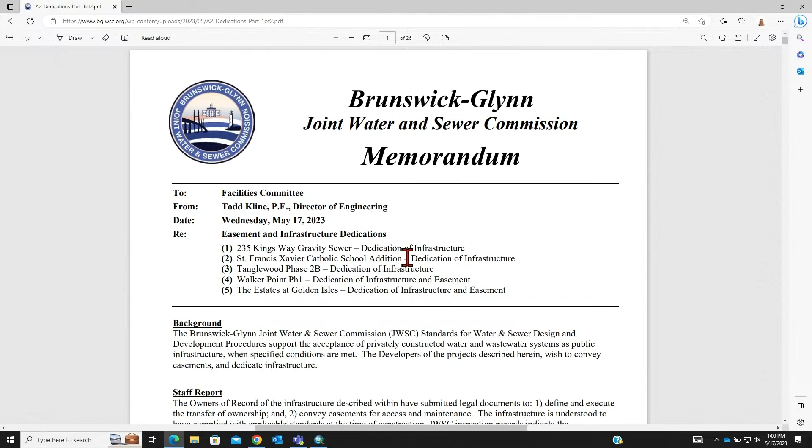All right, Commissioners, this is easement and infrastructure dedications. There are 5 items on this agenda, and I will give you a brief description of each item, as well as a location, and if there's any questions, I'm happy to answer.

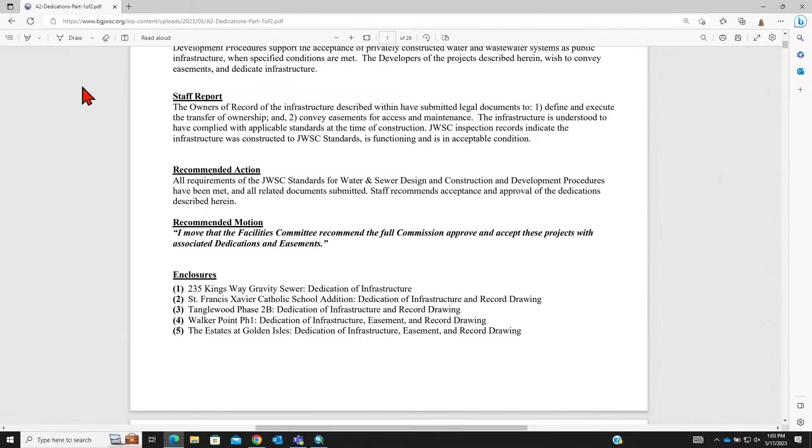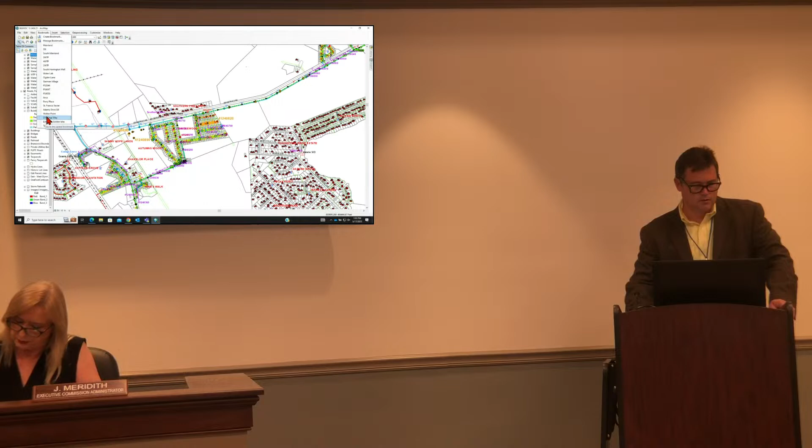Item number 1 is 235 Kings Way Gravity Sewer, dedication of infrastructure. The homeowner needed to extend sewer service to their property, so they facilitated that improvement at their expense. It's on St. Simons Island, right off of Kingsway and Bartow Street. As shown in orange here, as proposed, if accepted as public infrastructure, we will then turn it green, indicating it's publicly owned. Right now, it's just this home here that's tying in, 235 Kingsway.

What's that line, sir? It's a 6-inch sewer lateral. How many manholes? These are clean-outs, the fittings are represented by clean-outs, but it ties directly into a manhole on Magnolia.

The houses on the other side of the street? Yes, sir, what this will do is open up sewer connections for the home across Bartow Street. They're currently on water only, so it will at least give it one or two other connections to make available with gravity sewer.

Next item is St. Francis. Can I ask one question? Yes, sir. So the homeowner paid for the installation of it. That is correct. Was it inspected, contracted with a local contractor? Commissioner, you're correct, the homeowner, at their expense, installed this improvement. It was actually designed, they hired a local engineer to design and present it to Joint Water.

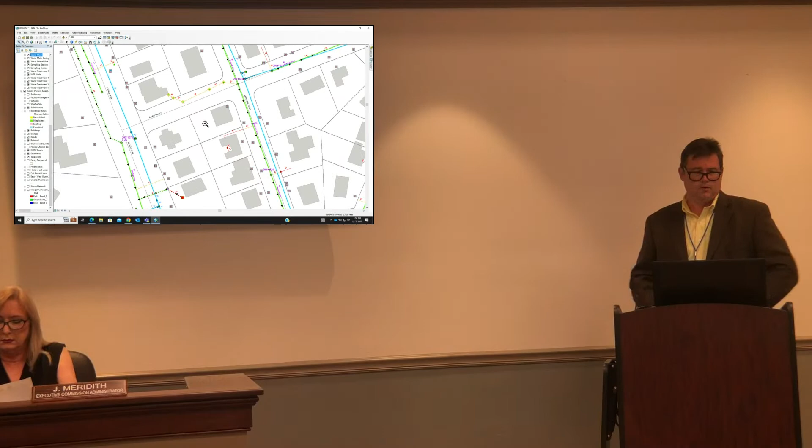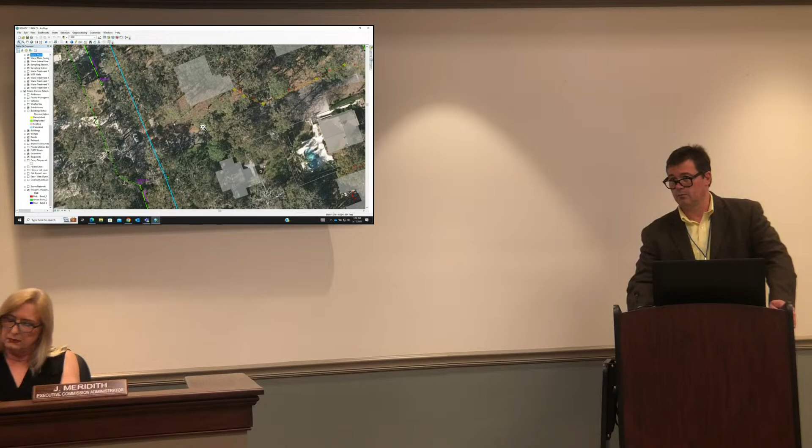Couldn't that house tie onto that manhole at 2003 Kingsway? I think permitting to cut Kingsway was going to be a challenge. It looks like it's on this side of the street, so let me turn the ortho imagery on so we can check this out. Well, that doesn't help much, the beautiful trees kind of obscure the view. But on the other side of Kingsway, there is a manhole—it's an end-of-line manhole. They would have either had to bore or cut Kingsway, and I think it was prohibitive as far as right-of-way permitting for them to get that approved. Not to mention cost. Yes, sir, exactly.

Just for my curiosity, on a project like that, what would be the ballpark cost for the homeowner? So for the homeowner, the value that they provided us was $12,910, as constructed. Then we will capitalize that, it'll be added to our inventory as an asset. And they pay a sewer tax fee also, correct, yes sir, in addition to that.

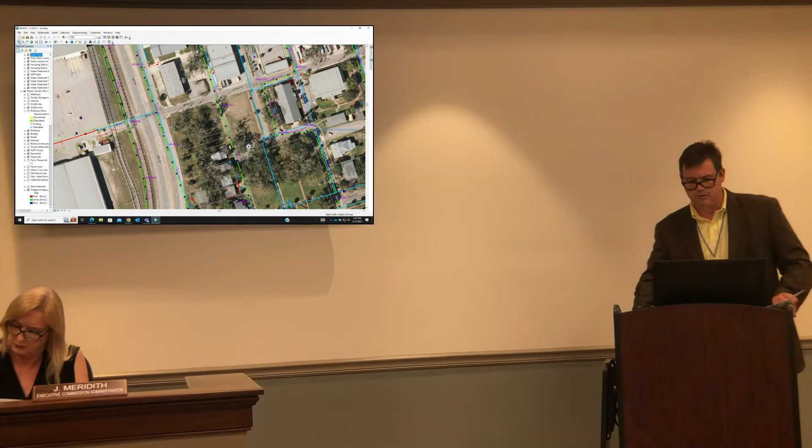Next, second of 5 items for dedication is St. Francis Xavier School within the city of Brunswick off of Howe Street. It doesn't show on the county's GIS site yet on the ortho photo, but St. Francis Xavier purchased these lots at the corner of Bay and Howe Street.

Their new school facility exists there now. As part of that project, they needed water service to that location for fire protection as well as potable use, and we partnered with them to help extend their water to the new facility. We provided the 12-inch material, since they were going to have to install 4 or 6-inch material for their needs. We said, if you're going to go ahead and do this, we'll provide you the material. That's what Joint Water contributed. They installed it, and that helped us get another piece of our Bay Street 12-inch water main replacement accomplished at the same time.

So this is the dedication. We did provide the materials, but this is the dedication of the infrastructure since they installed it, went to that expense, all within public right-of-ways. So it is a dedication of infrastructure.

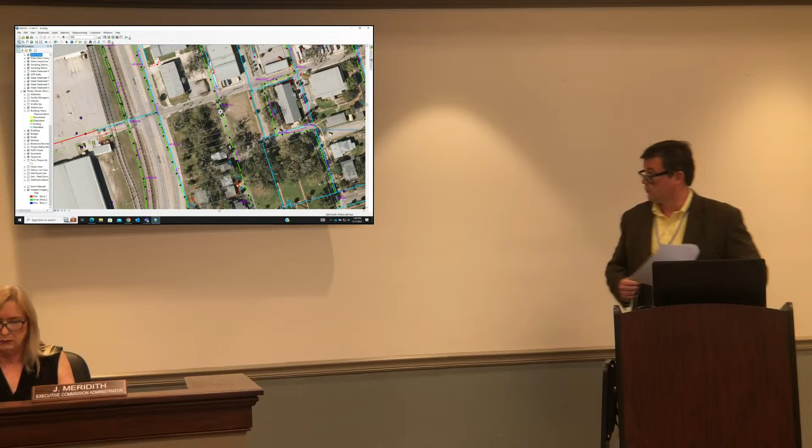They valued it at $89,300. It doesn't show up yet, but once, if the board chooses to accept it as public infrastructure, we'll add it to GIS. Right now it doesn't show, but the main comes this way and then goes up here and then ties into their connections there.

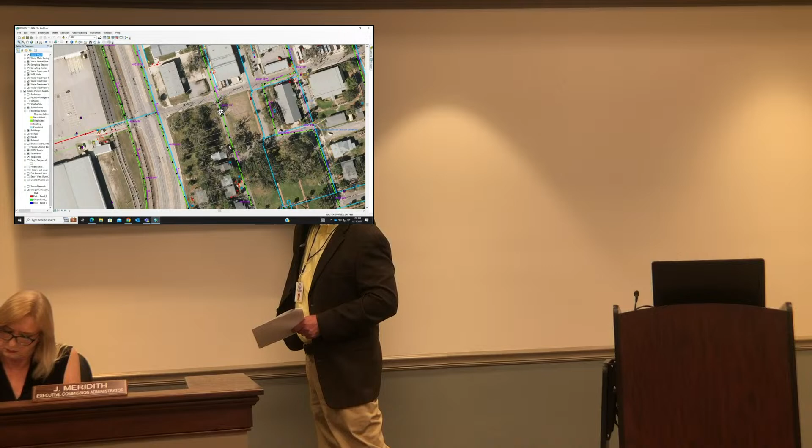It's stubbed out for future connection up Grant Street, and then also back to House Street. You put a hydrant up there at the intersection of the two roads. Yes sir, there's fire protection, I believe yes, they did add one. There's a new fire hydrant here.

Okay, number 3 of 5 is Tanglewood Phase 2B, residential subdivision on the northern area of Glynn County. I will turn off the imagery for a little bit of clarity here. This is off of State Route 99, directly across from Southern Pines Mobile Home Park, Tanglewood subdivision, and this is for Phase 2B, which is this area here.

Are these single-family homes? These are single-family homes. What size lots? Quarter-acre lots. So they're on both water and sewer out here. And this development has brought us, this phase, just this phase, 39 additional new connections, developer-driven, developer installed, and now their intent is to dedicate that to public ownership. Gravity sewers, what size? 8-inch.

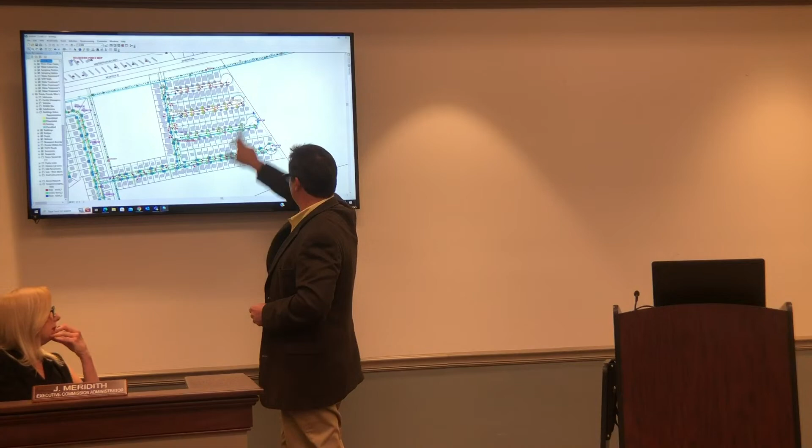The homes are not built yet there, right? Oh yes, they are built. I didn't know, I was around that area and I just didn't know which phase they were on. Right, you'll see, yeah, they're indicated here with structures. They're very aggressive in their building schedule, the vertical schedule with this. We've already got meters set, new customers connected out there.

And just as a side note, if the board does choose to accept this as public infrastructure, that will begin the 2-year warranty phase for the infrastructure as well. So that actually came into play with one we'll talk about here in just a second this morning. The developer's responsible for any repairs, warranty items for 2 years after we accept it as public infrastructure. 2 years, industry standard? Yes sir.

And how is that, I guess, repair can be somewhat subjective, granted it's not perfectly subjective, but how much leeway do we have to enforce what we believe needs to be fixed versus how much subjectivity is there for them to say, I think that's fine? Very good question.

I would think we'd evaluate, say if it was a failure due to installation or materials, a rolled gasket or a fitting came loose, something like that. For example, if something settles, settling can be very subjective. You've got substantial settling that really creates an issue, then you've got settling that is so minor that some people might say, oh, that's fine, we're not fixing that, we're not going through the expense of fixing that because it only settled a quarter of an inch, making something up. So what threshold, who is the person that gets to decide whether this can be fixed?

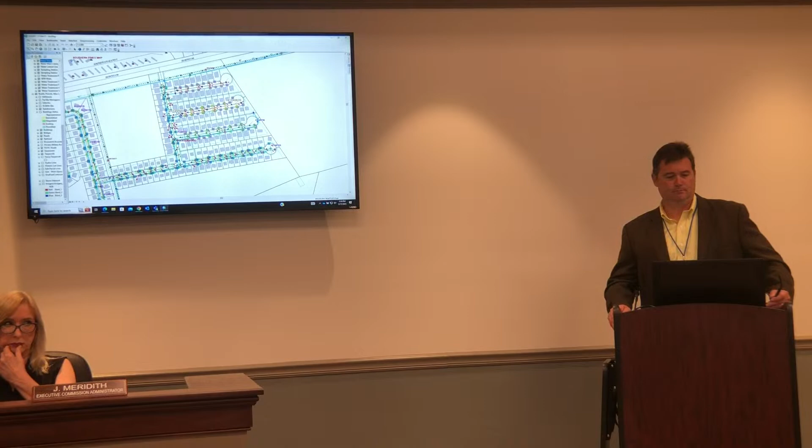I assume they are, yes sir. When these would have been ordered, they would have been after we started the meter project. They pay water and sewer for each one of these. Yes sir, absolutely, that's right.

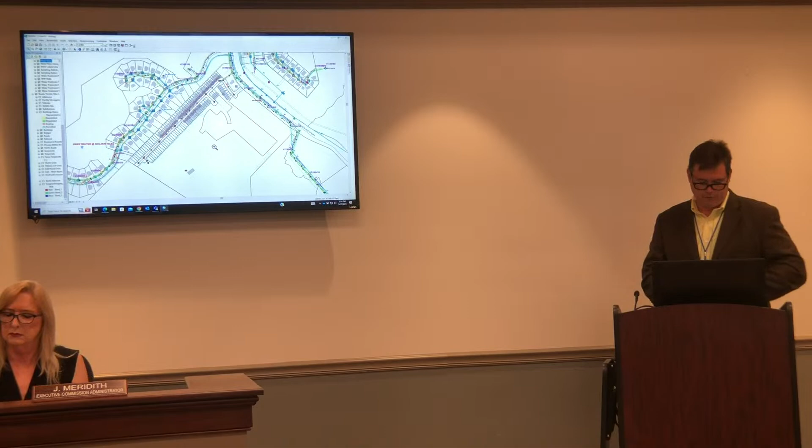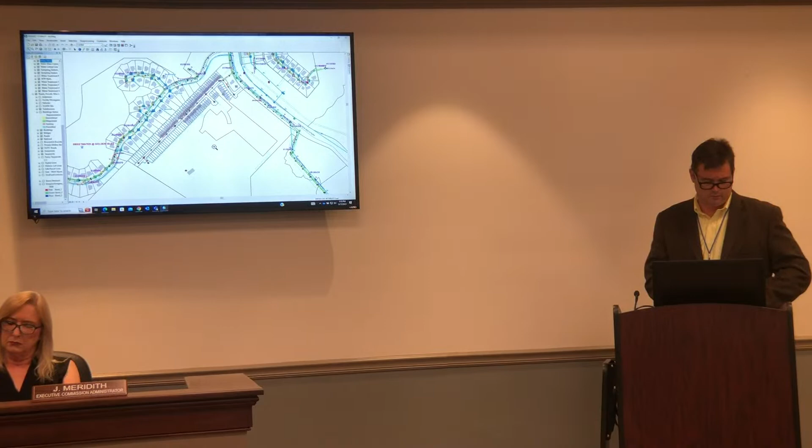All right, so 39 new customers with Tanglewood Development. Next project is Walker Point, just down the road a little ways. Walker Point is being developed on the former site of Coastal Pines Golf Course. This first phase, phase 1 of Walker Point, is bringing us 105 new customer connections, and this is also water and sewer infrastructure to be dedicated.

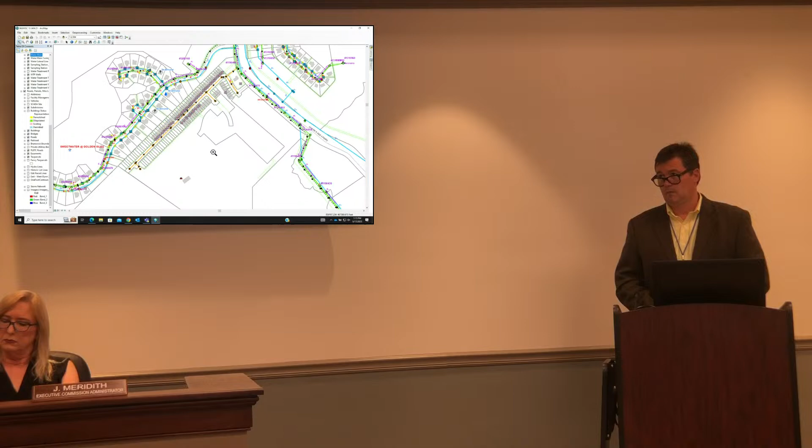For all these linear feet, do we have a standard cost per linear foot that we allow them to use, or do we allow them to say this is what we believe the value of this to be? We compare it to what we've seen, we track values, tables of values for bid projects and things, and we do compare it to that. We don't necessarily dispute it as long as it's reasonable.

If it's reasonable, we don't necessarily dispute it if it's a few dollars off here and there. As long as it looks reasonable, we allow the engineer of record to declare the value. When they're declaring the value, they're basing that on the actual cost to the developer.

Are these townhouses? These I call brownstones, sort of, but yeah, they're small townhome style. And they have immediately rolled into phase 2.

And I assume these are different size pipe. The reason I ask, the linear foot cost at Walker Point is significantly higher than the linear foot cost at Ridge Enterprises, just for the water line. Actually, both of them - the sewer's even worse, even further off.

So I didn't know, I mean they're probably different size pipes, right? I was just curious if we had a reasonable range for 6-inch pipe. Yeah, I mean it could be different size pipe. Depth on the sewer can have a big impact on installation. There's a lot of factors in there.

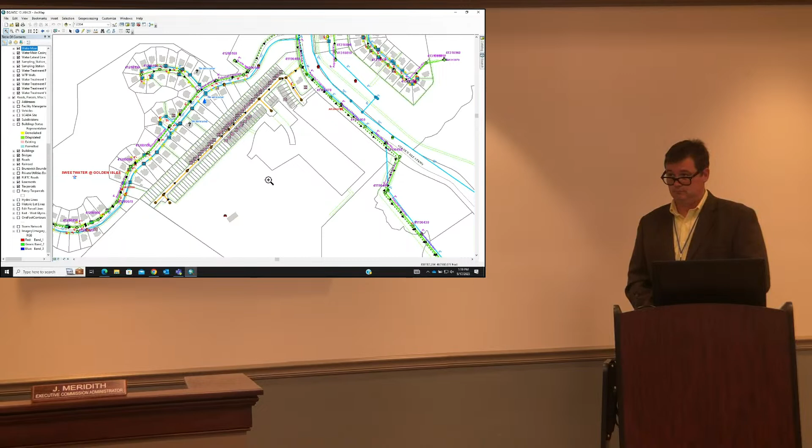And this comes with the standard 2-year warranty? It does. Absolutely, let's keep adding them up. Yes sir, that's the way we look at it, bringing them on.

So Walker Point Phase 1, 105 new connections, that's a monthly water and sewer bill. At full build out it's going to be like 450, right? That's right, yes. And they're moving aggressively out there.

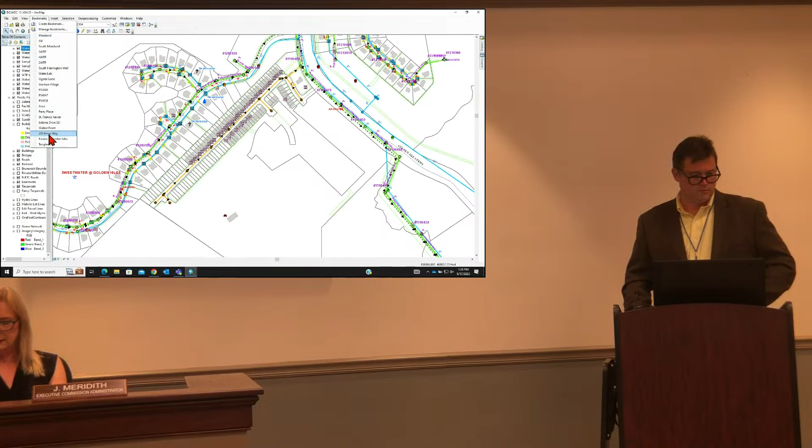So the next one, and the final one, is the Estates at Golden Isles, again just up Golden Isles Parkway Extension. Seems to be a busy area. It is, and this development here is actually additional growth to a phase that was started 20 years ago.

So it's fill-in work, previously platted lots that are now being developed out. So this is the adjacent street that was put in here, and this is phase 2.

It's developed by Ridge Enterprises, Mr. Keith Rhodes. They put a line on it, they don't have the lots subdivided yet, they're working on final plat, the county just doesn't show it in GIS yet.

So we have an easement over that whole property right now? It's public right of way, it'll be platted as public right of way.

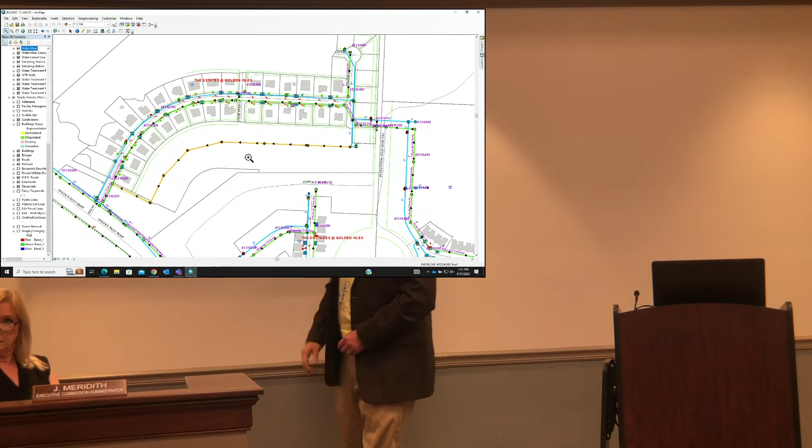It'll look very similar to this one. The lines in the center of the street or on the edge of it? The lines are generally outside of the pavement.

In phase 1 they were. Honestly, I don't know in phase 2 if they're under the middle of the road or on the edge. Don't we try to put them outside the pavement, both the sewer lines and the water lines? If there's enough right of way, we encourage developers to do that, yes.

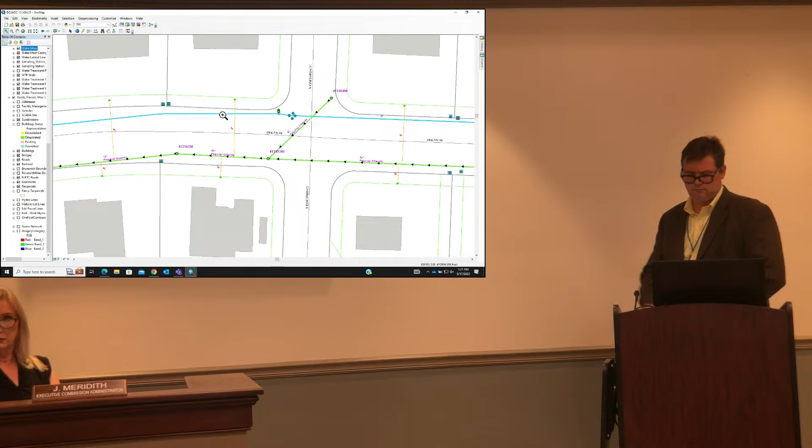Don't we have a standard that says that? No general standard, the preference is to be outside, but there's no hard, firm requirement. But it says so in the standard, yes sir, the preference is, so it can be in the shoulder.

For places that have plenty of property, do we not require it? I mean if they're developing new, if that lot's being 0.5 versus 0.44.

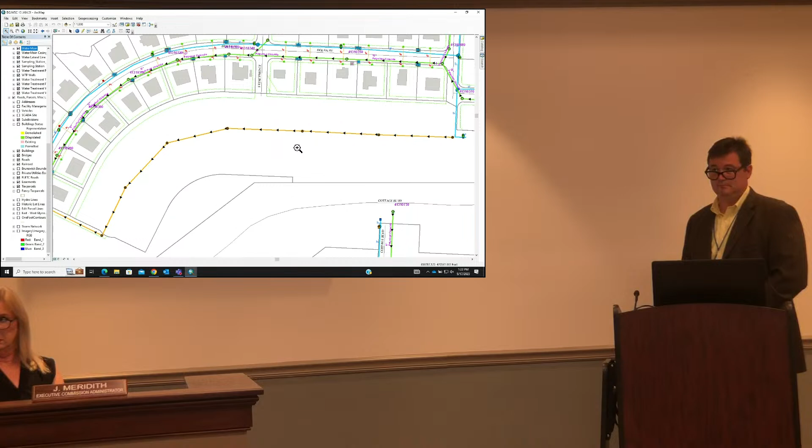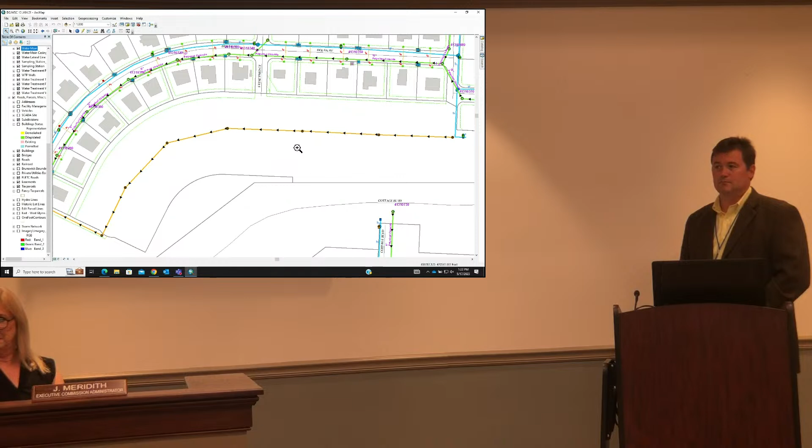We just don't want to tear up new streets to fix the sewer line, just put it in right. That's correct. Another reason for the hefty inspection on the front side, to make sure it's put in the ground correctly, but you do have to be ready for any kind of settlement, anything that may happen to the new infrastructure in the future, so we have to be diligent on the inspection.

And I would think the person putting it in is diligent because they know they're responsible for the first 2 years anyway. Very true, yeah.

Occasionally you do have some things that don't get lined up perfectly when they install, ending up a section under a roadway that was supposed to be on the edge, just because when they came in and paved it wasn't exactly laid out. But in general, they do a good job.

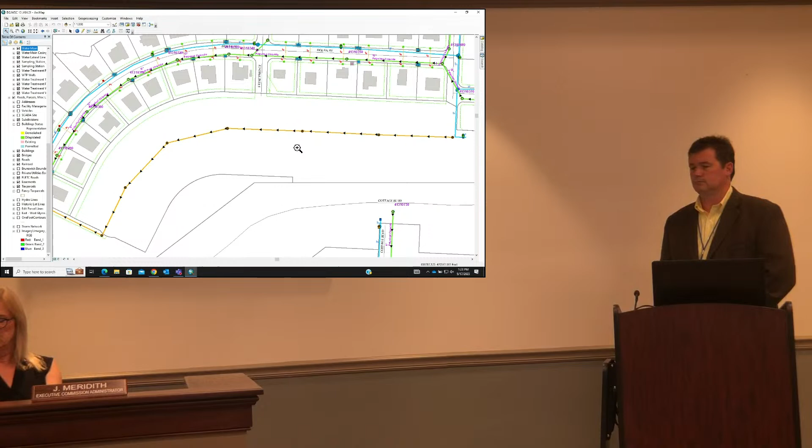We do record drawings. Correct. So you should also have those as part of your packet, the supporting documents. Hopefully, record drawings. I was looking at them the other day. It's a lot of paper.

Yeah, it may be. I don't have the drawings pulled up here. On some areas, like the Estates of Golden Isles he was just talking about, most of them appear to be close to the shoulder, maybe not exactly out from underneath the pavement, but right on the edge of the pavement. But that one section does jut out into the center.

Sometimes that conflicts with the developer's plans. The developers, for the trips we're talking about, they already went, the line got in. It's in line right now. But the trouble is, 10 years from now, we have a road and we have to pay the price.

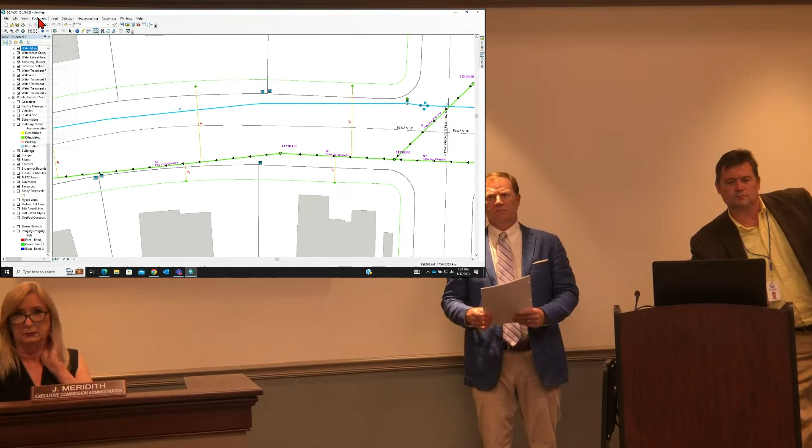So I assume some of these houses, or most of these houses, are probably fine with a 5/8 by 3/4, but they may want a 1-inch meter if they have a multi-story house, for example. Right, and then, okay, so the tap fee.

As a side note, I believe one of the customers is gonna be installing a sewer line as well. Gravity, yeah, so a low pressure sewer main back out as well. We're putting that down the whole lane.

From what? They're putting it from their house back, across this easement. It's the same.

Which easement, house is it? The one that's doing sewer is this one here. So this is the first one.

It's just right there. But if somebody downstream wanted to, they'd be within 500 feet of that sewer line, and they could tie in to the sewer line at that point.

So that sewer line they're putting in, they'll deed over to us? Yes, well, I don't know if they'll deed that to us, because it's not public right of way. Since it's in the easement, it will come to us.

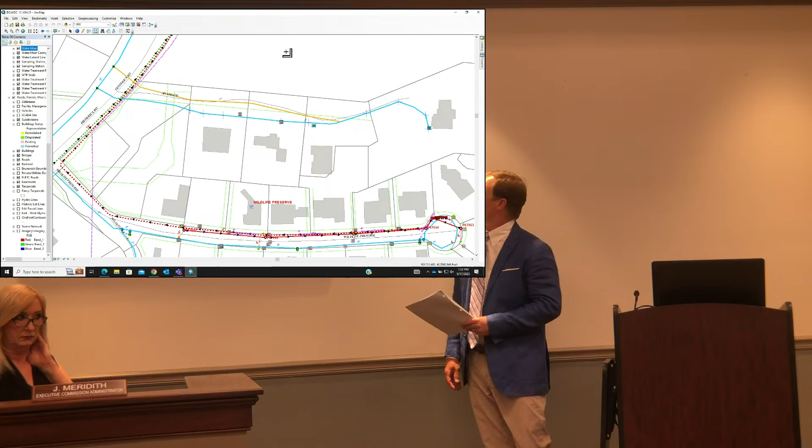So it can be a shared one after. You mentioned that we took some time to get the easements to their liking. What kind of concessions do we have to make on our easements to get them to their liking?

Really not a whole lot. I mean, nothing that we weren't okay with.

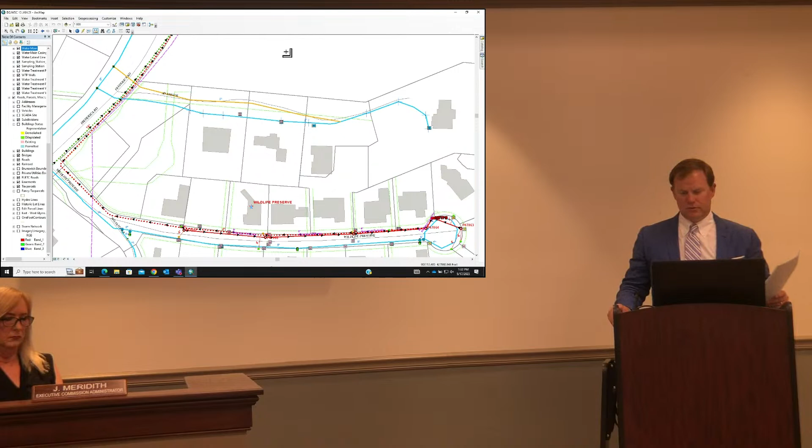There was some discussion about how much property was needed and how we were gonna describe it and things like that. And Mr. Spate, who owns this lot right here, is an attorney. This is his son.

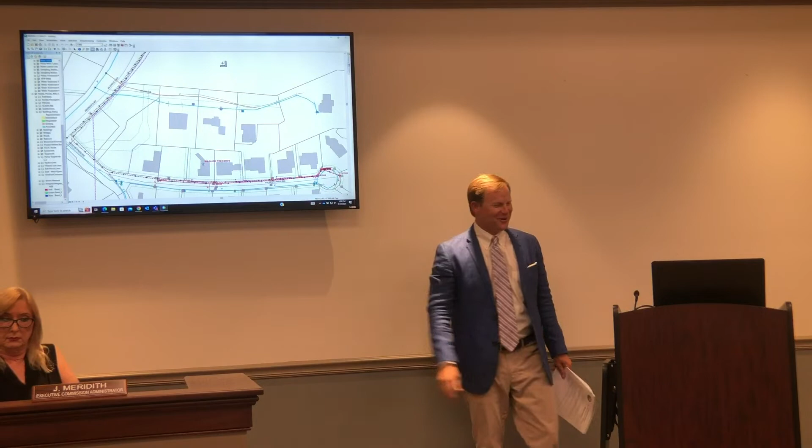Also an attorney? No, Alex is not. Anyway, we had multiple attorneys involved, and that's just gonna make it... I know that.

Yeah, there's several estates back in there. Right, yeah, it's Alex and Dan. Well, there's another one too.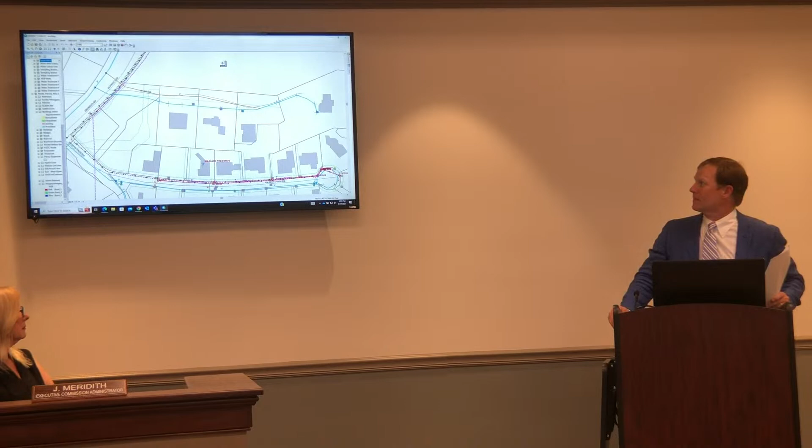That first one you clicked down, put on it again, that first one you touched on, yeah, this is Alex, this is Dan. The one south of that, that's an easement too. Yeah, he owns both of these. Oh, okay, same guy, he's got a little lot.

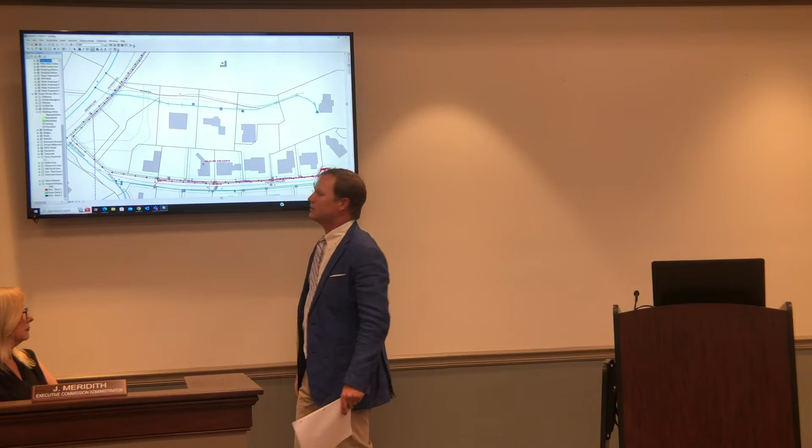So we're getting rid of the galvanized, getting an update on everything, and we're gaining some new customers. Yes sir. Okay, good, it's a win-win. Other than the paperwork side, it's a smooth little project - get customers online and get some old galvanized out of the system.

Motion: I'll move the Facilities Committee recommend the full commission accept the Adams Road easements. Second. Any other questions?

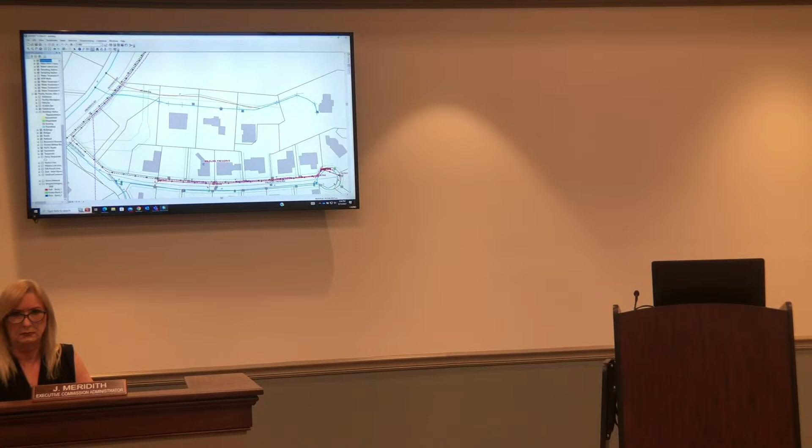Yes sir. Month of April, another strong water use month for us. One thing I will point out, you may have expected the mainland system to have substantially more water usage than previous because of the fire at Pinova.

But when you average it out over 30 days, the increase is not as substantial as you might expect. We put somewhere between 600,000 and 800,000 gallons of water on that fire, but when you divide that over 30 days, it's a relatively small total compared to the overall month. But a little over 5 million gallons of water for the month in the Brunswick district.

Still working on some of the wells, ongoing work on some of the electronic systems and things like that. But all in all the wells are functioning effectively at this point. A little bit higher than where we were at this point last year on the graph behind it, so very flat usage month to month for the first 4 months of the year.

It's been very dry as well, so I think we're seeing a decent amount of outdoor water usage for the last couple of months.

On St. Simons, the airport well saw increased usage. That's the backup well, used for the first half of the month because we were doing work on the main well there. So when we turned that back on, the main well outran the backup well, and we ended up getting a little more water than we had the previous 2 months through the airport well.

Just shy of 3 million gallons of daily usage on St. Simons for the month, again a little higher than where we have been for the previous year. Some of that is new customers, but also outdoor water usage probably increasing in the dry periods we've had.

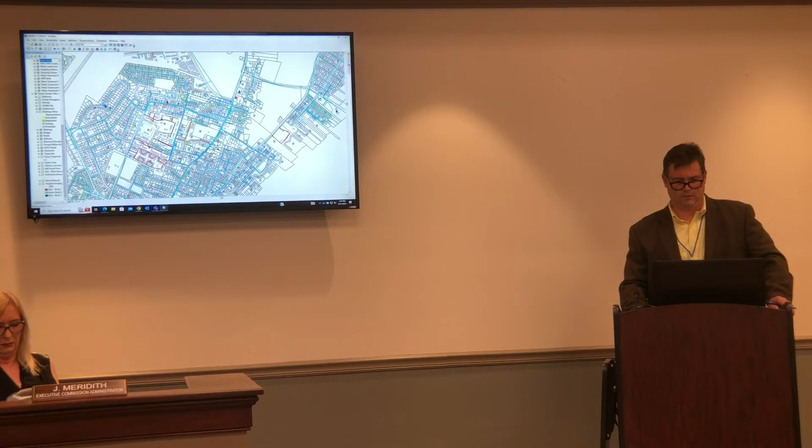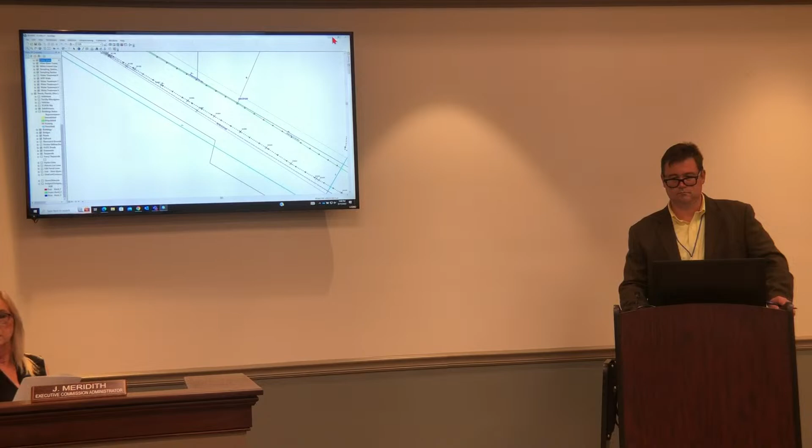Yes, sir, it wasn't striped, the picture I received, but it looks like asphalt is on the ground. Here's my question. Right, so that was last week. They paved it this week, they started paving yesterday. May not stripe it, I don't know, but either way, the roadway should be paved this week. We get invoicing, we can get this closed out before the end of the fiscal year, hopefully.

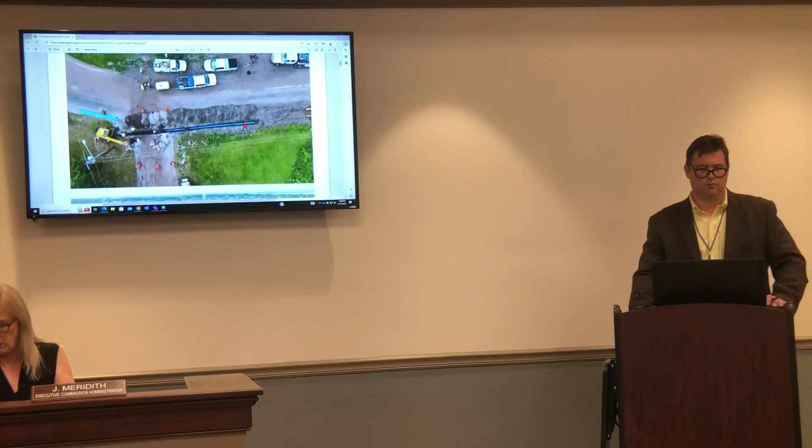Okay, next project to speak about is the ARCO Area Water and Sewer Improvement Project. This is a good overhead shot of water main installation that's going in, and the contractor has mobilized a second crew to wrap up the water. So they have 2 active crews out there, one doing gravity sewer, one doing water main installation. There's an overall of the majority of the project area of this phase of the ARCO.

And we're looking forward to getting the first gravity section in service. We're very close, hoping to report at this meeting that it was open for business, but they're doing the last bit of testing, vacuum testing on the line, on the manholes, and low pressure testing on the lines. That should be wrapping up this week, and we're hoping we have people beating our doors down to tie on next week.

So there is a lot of need out there with on-site septic systems. How many new water line customers do we have out there? The water line's finished, right? Water line installation is not complete yet, about 80% done with the lines. Do we have any new customers up there on the water lines yet? I don't believe we have any new ones tied on yet. But over 90% of that area already was on the water system.

I think most of the water system areas that are getting access to water are currently vacant lots, the vast majority of those.

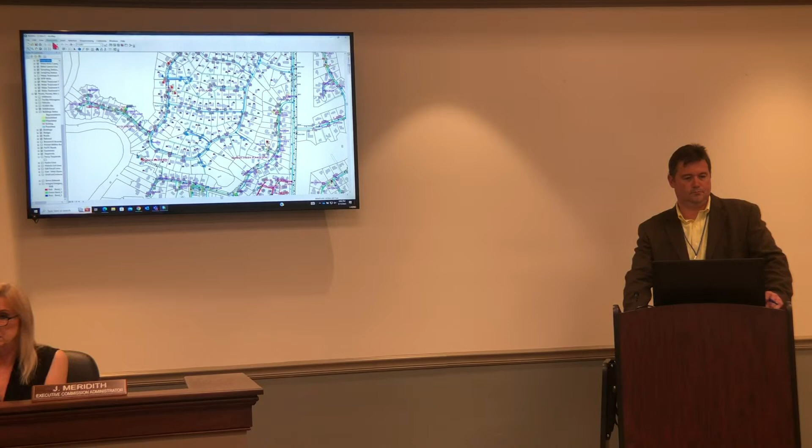Is that land we're talking about swapping strategic land for us in the future? Would it be better instead of swapping the land and giving it up long-term, to give them an easement to use it for whatever purpose, with the understanding that it could still be used for expansion if needed? Well, the ongoing discussion is a low-dollar lease program for them to utilize the property for the time being.

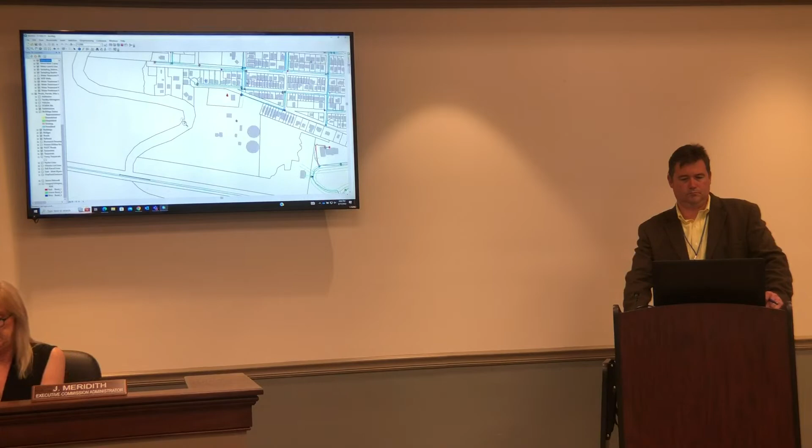What I've been clear with them is there would have to be a get-out clause on that property. That's why Charlie's getting that word into the lease, because I was recommending doing leases, like a swap. Essentially we would have use of that property adjacent, because as you know, open space on St. Simon's is at a premium, and having a little more area to store materials for projects is a tremendous benefit to us.

Right now we have an MOU that's been circulated amongst the three parties. The county discussed it yesterday at their special call meeting, and once that's approved by all three parties, then we'll start working on the lease.

It's a DNR grant program that they use to put in the kayak launch. I will say for anybody that uses that kayak launch, there is a huge alligator that lives right there, so I would be on the lookout.

This is not something that's right around the corner. With DNR involved, it's gonna take a while. I've outlined that we may want to put up some sort of more sturdy fencing, not just for security, but for not having the view of the wastewater plant adjacent to their kayak launch. That would be part of the county's project.

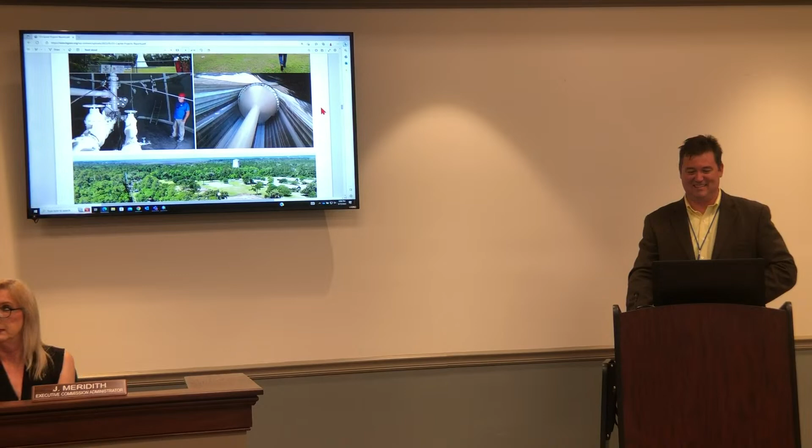This is a shot looking up there with the drapes hanging down. Always feels kind of funny to get in that picture—that thing looked very weird, blowing in the wind. So that's the contractor's containment system to keep all their abrasive blast, which is just Black Beauty, a non-silica based abrasive, and any paint spray or anything that could possibly come off-site, keeps it on site.

Looking from Lawrence Road, facing south at the Oglethorpe tank, you can see the drape over that one too, the shielding on it, looking over the stables property. The idea is we'll have our logo on this side, and also 180 degrees on the opposite side, for a little bit of visibility from Lawrence Road, but that storage tank was, by design when it was built, put inconspicuously back off the road.

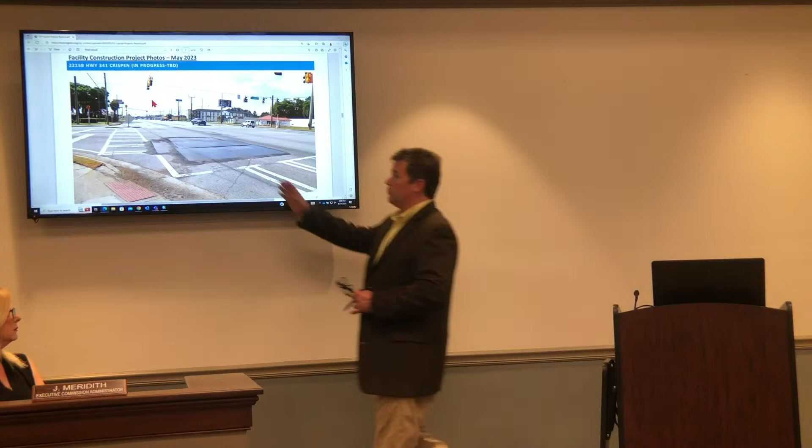The first step is dewatering, and then they're going to do soil injection grout to stabilize the soil over the collapse. Once that's done, Bionomics is going to go in trenchlessly after all the bypassing is done and try to do the repair trenchlessly, slip lining the whole line. Once that's done, they're going to go in and fully rehab both manholes on either side.

As with a lot of things these days, materials have long lead times and whatnot. The timing on this is going to be very critical. It's going to be a summer job.

Glynn County and DOT both voiced their desire to do this after school is out for the summer. So that gives us a little time to get the permitting in motion and approved, and bypassing as well.

Just the liner alone, according to the contractor, is about a 3 to 4 week lead time on materials. So a lot of decisions to be made here in the next couple of weeks on what we're going to do. We should likely be prepared for the worst, so to speak - get the liner on order and that kind of thing, have everybody situated.

So what is it going to look like out there when it's under construction? Crispen Boulevard, this area is going to be detoured. Both lanes here will be shut down at this intersection.

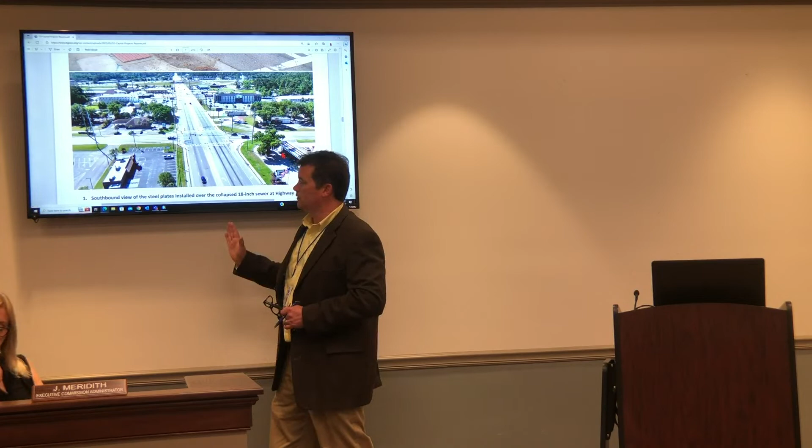It'll actually be detoured back at Old Jesup. So access will still be available for whomever to the shopping centers and other businesses, to the bank here - they have another access here. Access will be maintained, it's just a difficult job.

The bypass alone - this is the segment of gravity sewer here that's defective. We're going to have to bypass past this manhole and get to the next one, which is in front of Sonny's business, right here. There's a manhole out in the asphalt out here.

And you wonder, why do you put gravity sewer in the middle of a highway? Well, I believe the gravity sewer was there before the highway expanded in this case. So it's not ideal where it is, but it is what it is. I think we spoke last month about this - this is one of the more challenging segments in the system to work on just because of the location.

Can y'all safely do it with only one lane before the other one's closed? Yeah, it looks tight, I mean. It's very tight, it just looks like - it's right on the edge. Looks like the plate extends to the second lane. Look at the picture above.

How deep is it? 15, 16 feet. So you're going to put in excavation protection, trench shoring, everything. Correct. And the plan right now, DOT's fine with this being a DOT highway, is we're gonna put flowable fill back in there, so I don't think anybody's gonna ever need to go back into this area. It's low strength concrete, so it's a quicker set, not so worried about compacting layers of soil upwards, and a lot faster finish to get traffic back on it.